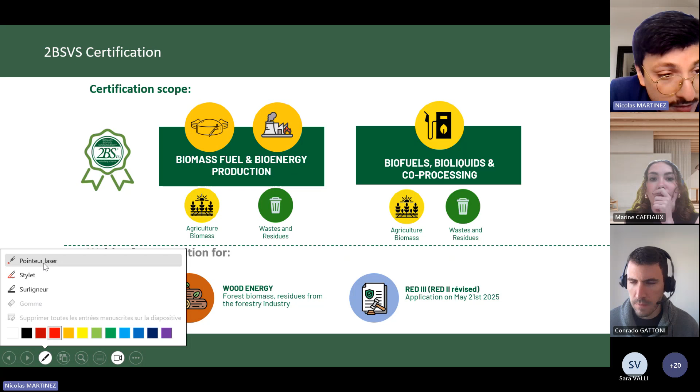We're going to talk more about co-processing, since this is the topic of our webinar. The documentation you can read for more details about the requirements and how audits happen can be found in two documents: the standard number 2 and the procedure number 6. The standards are like the checklist of the auditors, and the procedure is a more detailed document explaining the specificities of co-processing.

The procedure incorporates the following provisions, so you may also be acquainted with these two documents: the implementing regulation 2022/996, which has a chapter with specific rules for co-processing, and implementing regulation 2023/1640 about this as well.

As you know, co-processing refers to an oil refinery unit that processes, in addition to the usual fossil feedstocks, a biogenic part in the feedstock. At the end of co-processing these two feedstocks, we get a fuel of which a share is biogenic, thus considered renewable, and it can be claimed as such. To do that, you have to be certified and follow the requirements of the RED II.

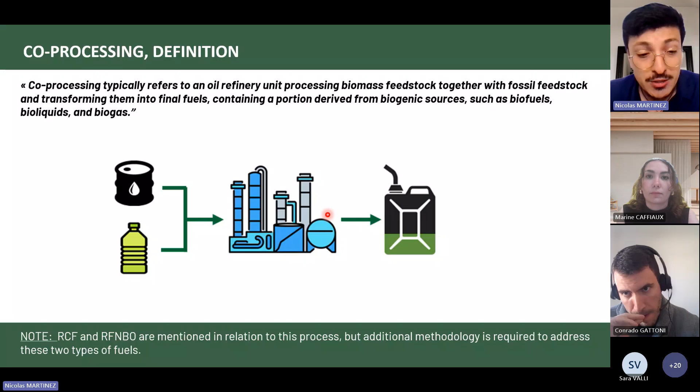Talking about the RED more in general, the two main pillars of sustainability are the eligibility of the raw materials to be part of the supply chain, and the greenhouse gas emission savings.

Concerning eligibility: if it's energy crops, they must come from sustainable land. The collection of agricultural waste and residues must not affect soil quality or soil carbon stock. And if it's waste and residues, they have to meet the definition of the Waste Directive 2008/98 and comply with the waste treatment hierarchy, prioritizing recycling, etc.

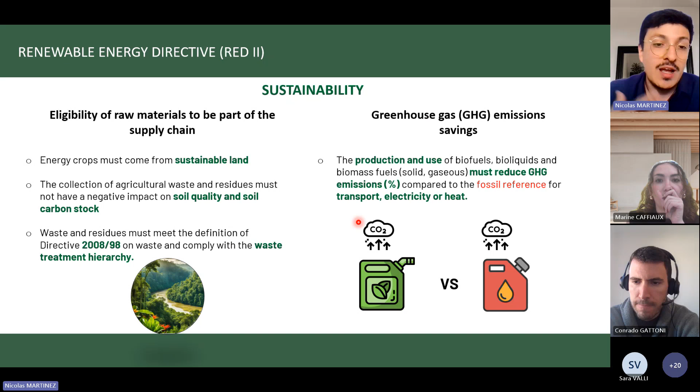Concerning greenhouse gas emission savings, you may already know this - we have to confirm that the greenhouse gas emissions to produce these biofuels are much lower than the fossil analog. There's a percentage stated in the RED about this. To compare, we have to calculate the footprint of these biofuels, to be sure we meet this criteria and have a positive impact on global warming.

Now let's talk about the scope and the certification of the actors in the supply chain. As you know, if we talk about waste oils or fats, waste and residues arise at the point of origin, the waste producers. Then there is a first gathering point - the first entity in the supply chain that gets certified and analyzes and confirms the sustainability criteria from these collected feedstocks.

Afterwards, these feedstocks are transferred to the next actors downstream in the chain. They can be traders, processing units, or other actors that process them into intermediate products. Afterwards, these processing units, the last interfaces, produce a fuel - in this case, a co-processed fuel.

There are two standards in our voluntary scheme: standard number 1, for the collection of raw materials, and standard number 2, for all the actors afterwards in the chain. Standard 1, for the first gathering points, concerns the collection of non-certified materials.

As you know, you see here it's black and it becomes green. The first gathering point ensures the sustainability criteria of these non-certified materials and issues sustainability declarations to prove conformity to the RED. Afterwards, there's the point about the audit of the central office.

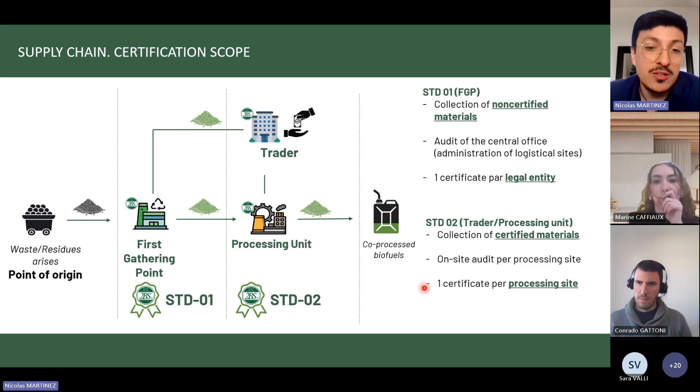After that, we have our product that is going to have a part of biogenic material. Concerning the greenhouse gas emissions, in the case of waste and residues, they are considered to have zero life cycle emissions according to the RED. So then there is going to be only the emissions due to the transportation from the point of origin to the actors in the supply chain.

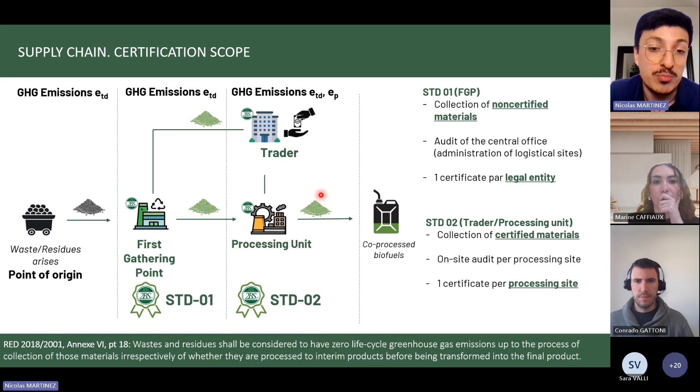The first gathering point, the same, only transportation. And afterwards, the traders or the actors certified in standard 2, they are going to have the EP, so for the processing itself, the emissions that were emitted for this.

Here you have a diagram of the whole supply chain, an example of it. So if you are a refinery producing biofuels, your suppliers may be traders or other processing plants. For example, if you use virgin oils, then the point of origin is going to be the agricultural sector. If it's waste and residues, it can be restaurants, industries, eco-organisms collecting used cooking oils, etc.

These points of origin will transfer a self-declaration to the first gathering point. This is the first actor that is certified in the chain. These can be cooperatives in the case of crops, or treatment and storage facilities for waste. These actors are going to transfer a sustainability declaration to the trader or processing unit downstream in the supply chain, and afterwards another sustainability declaration if applicable.

A little reminder: households or private individuals are not points of origin. The point of origin in this case is the first actor collecting these wastes, for example municipalities or eco-organisms in the case of collectors of used cooking oil.

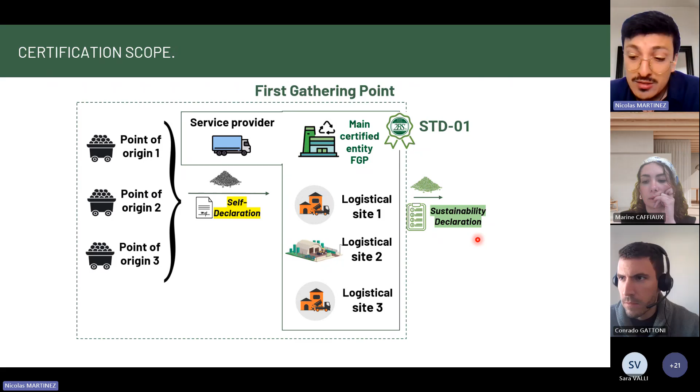Now I will give the word to my colleague Conrado about raw materials.

Thank you, Nico. Okay, let's move forward on this section. We will also discuss the criteria for raw materials requirements and the management system needed to ensure compliance. Just for clarification, this chapter may sound familiar to some people because the basics are the same as what you already know, according to standard 1 and standard 2. Please, next slide.

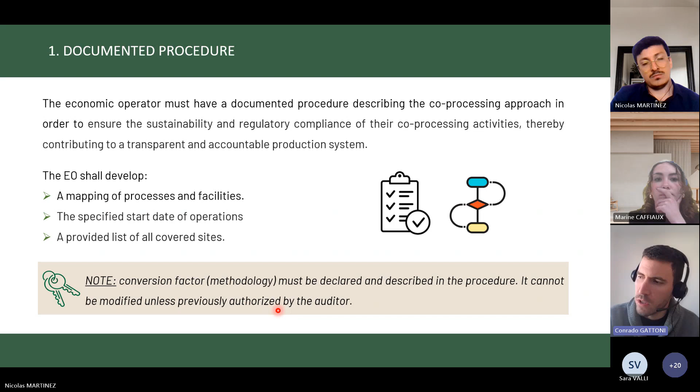Keep in mind, the conversion factor methodology must be declared and described in the procedure. It cannot be modified unless previously authorized by the auditor. When we refer to auditor here, we mean saving evidence of contact and reliable authorization from the audit team of the corresponding certification body.

Then there are primary residues, as residues of agriculture, aquaculture, fishery, and forestry. These materials also need to meet sustainability and GHG saving criteria, but in addition we must define what constitutes a residue through a decision tree, which is very important for distinguishing between materials that qualify as residues and those that don't.

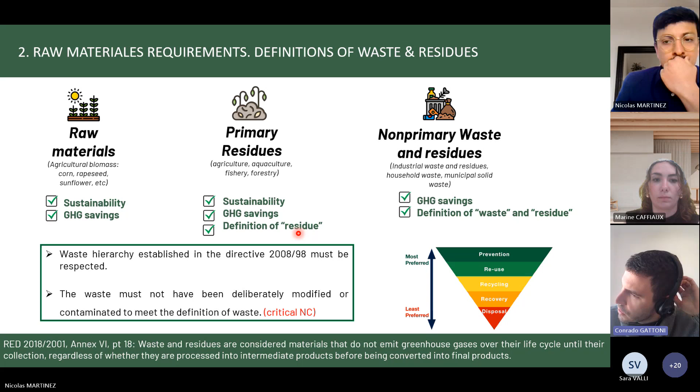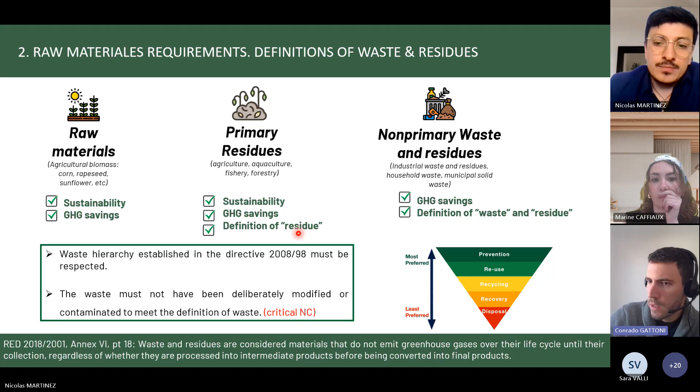The third point in the management system to take into account in this procedure is indicator 3.1, concerning the inspection of records, which is also intrinsic to internal reviews and monitoring activities that must be carried out annually. It's likely you already know this, since it's part of the internal reviews you perform annually, though this scope requires a stringent review to avoid mistakes.

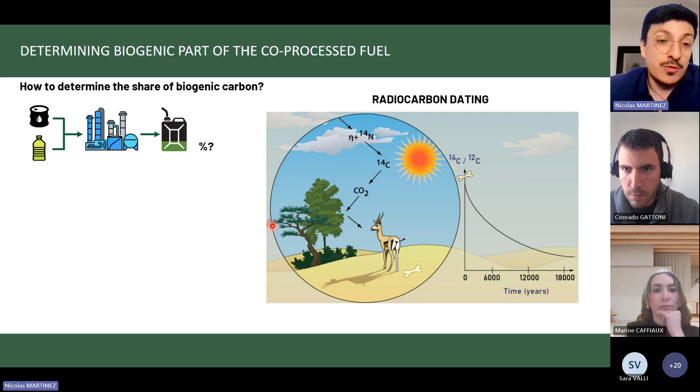The method preferred by the European Commission is radiocarbon dating. As you know, this is a method that measures the radioactivity of C14, which gives us an idea of how much is biogenic and how much is from fossil carbon. This method is mandatory according to the Commission.

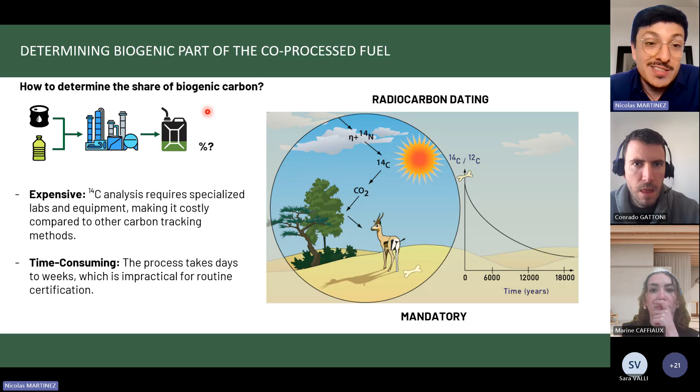The issue is that radiocarbon dating is expensive, requires specialized labs and equipment, making it costly compared to other carbon tracking methods, and time consuming. The process takes days to weeks, which is impractical for routine certification. Maybe some actors have radiocarbon dating in their facilities, but this is not very common practice. So the Commission allows figuring out these conversion factors and the biogenic part using other methods.

So how do we determine this biogenic carbon? Take the example of a refinery using fossil crude oil and vegetable oil. At the end, as outputs, we have gasoline, diesel, and kerosene. There is always a fossil gasoline and a biogenic gasoline, a fossil diesel and a biogenic diesel. The thing I'm trying to explain is that free allocation of biomass into the products is not allowed. You cannot say, 'I have 5% oil, so 5% of my gasoline is biogenic.' You cannot do that. The biogenic share is distributed among all the products.

Specific conversion factors are made for this reaction. So this vegetable oil converts into gasoline, diesel, and jet kerosene in this example, with different conversion factors. There is also a share of emissions, not only CO2, there's also CO and H2O attributed to the biogenic part. In case of multiple products, distinct conversion factors must be established for each product from each raw material. Biomass must be attributed to all products, including carbon monoxide, carbon dioxide, and water. So everything is distributed among all the products.

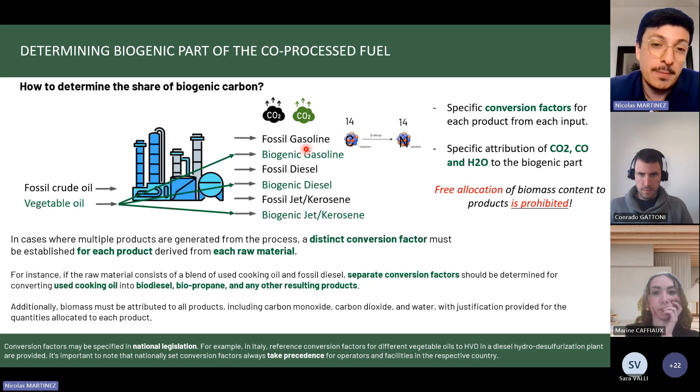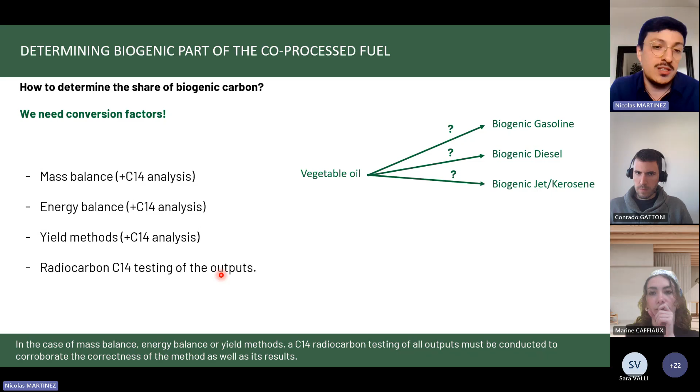As I said, C14 radiocarbon dating is the preferred method for the Commission. We measure the biogenic part of each product and get a percentage share. So how do we get these conversion factors, how to say how much vegetable oil converted into diesel, jet fuel, etc.? You have 4 options: mass balance, which still uses C14 analysis but just for calibration and rectification every 4 months; energy balance, also with C14; yield methods; and just the mandatory C14 method if you have that possibility. Let's talk about the methodology for each.

Mass balance methodology has the idea of mass, as the name says. If we have fossil crude oil as an input and biogenic oil as another input, then we have a fuel as a product, and we measure the mass. We perform C14 and calibrate our mass balance method, so we know that the biofuel has, say, 30% of a certain biogenic content. But since it's a mass balance, you cannot attribute the biogenic part only to one product. Everything is divided among all the products.

So the mass balance, the equivalence on both sides of the equation, means if there is 20% biomass in the inputs, the hypothesis is that at the end you will have 20% mass of biogenic source. This includes the mass of off-gases, liquid industrial wastewaters, and residues. Everything is taken into account mass-wise, and this 20% has to be proportional. This method can be used and will always be rectified by the C14 radiocarbon method.

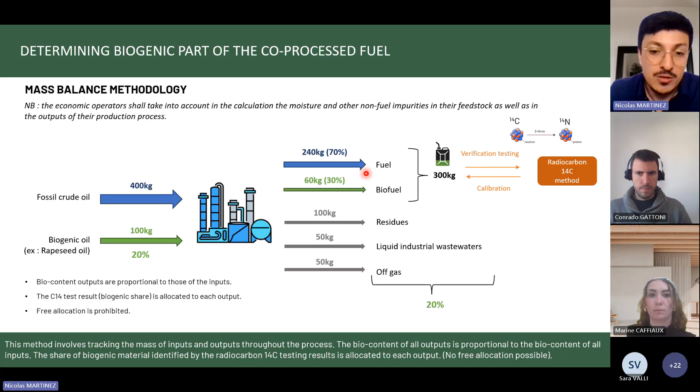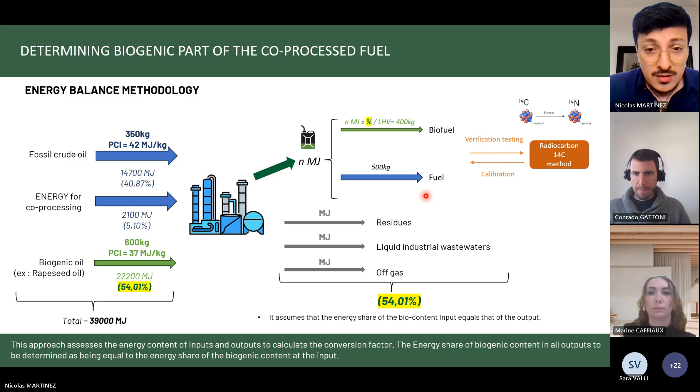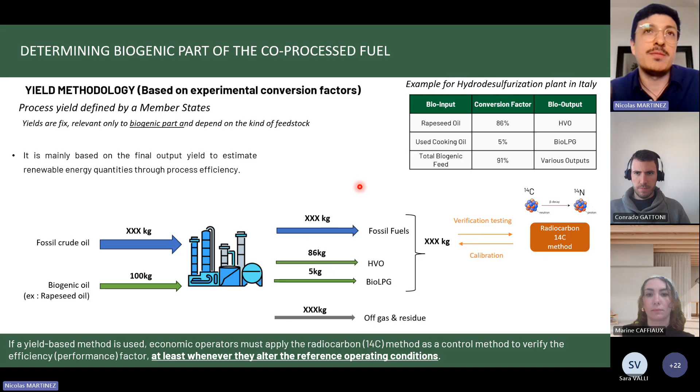Next is the yield methodology based on experimental conversion factors. If a member state has already defined a conversion factor to be used within its territory, it can be used by economic operators and refineries as default conversion factors. For example, in Italy, for a hydrodesulfurization plant, these are the conversion factors for rapeseed oil and used cooking oil - these bio outputs and values can be used right away by economic operators as default. It has to be officially recognized by the member state, and these calculations and values are validated by the Commission.

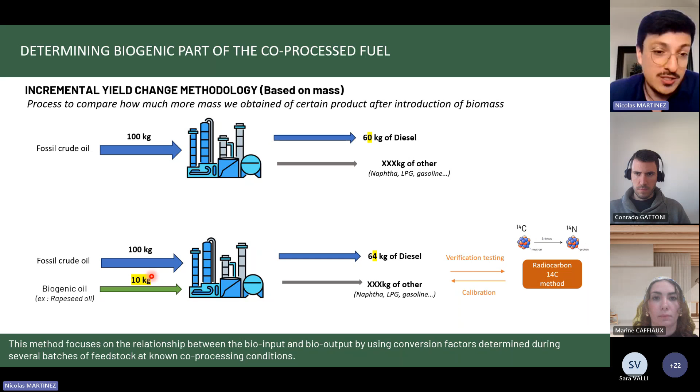The radiocarbon 14 method will be used to verify the correctness of this method. If you have several batches that have been done with specific conditions, you can link the biogenic oil input with the output of a certain amount of biodiesel. This can be done, but several batches have to be produced to have enough evidence to present to the auditor. Everything is based on the accuracy, the reliability, the evidence that you can provide about the methodological choice that you apply.

At the end, you have a C14 analysis. The economic operators that check this C14 have to apply the accelerator mass spectrometry method. If the bioshare is expected to be at least 1% of the volume, they may alternatively apply the liquid scintillation counting method. The labs that do this analysis have to be certified with different standards - you can find more details in our documentation.

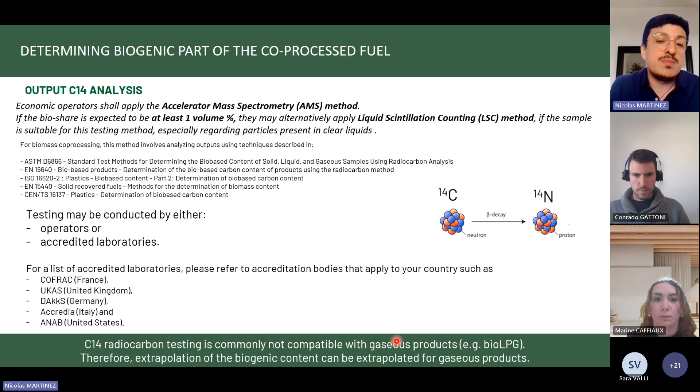The testing may be conducted either by operators themselves if they have their own laboratory on site, or by accredited laboratories. This accreditation of laboratories will depend on the country you're in - so in France, it's COFRAC, UKAS, DAkkS, etc. It's important to remember that C14 radiocarbon testing is commonly not compatible with gaseous products, for example bio-LPG. Therefore, extrapolation of biogenic content is allowed.

Experimental measurements conducted on pilot plants using individual components or model systems related to the coprocessing facility are permissible in the initial certification process, but then they have to be verified and supplemented with field evidence obtained during the actual co-processing phase in the plants.

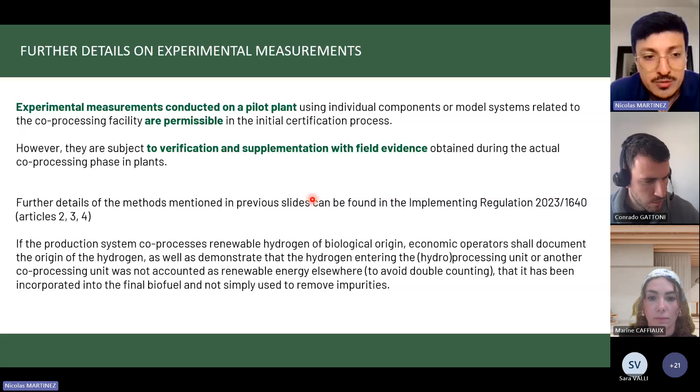This is the implementation that governs these rules. If the production system co-processes new renewable hydrogen of biological origin, we have to make sure no double claiming, no double counting of this hydrogen takes place. It's the responsibility of economic operators to prove to the auditor that this renewable hydrogen is not counted as renewable elsewhere, and that the actual hydrogen was used and implemented into the co-processed fuel. So that's quite logical.

There's further detail about this measurement. If the radiocarbon test method is used as a second method - so in the case of mass balance, energy balance, or yield methods - then a deviation of up to 1% in absolute terms for the result of the main method used is accepted. This is the maximum; deviation of more than 1% would be considered not valid. In the initial year, 3% deviation is accepted because you're calibrating your method. So there's some flexibility.

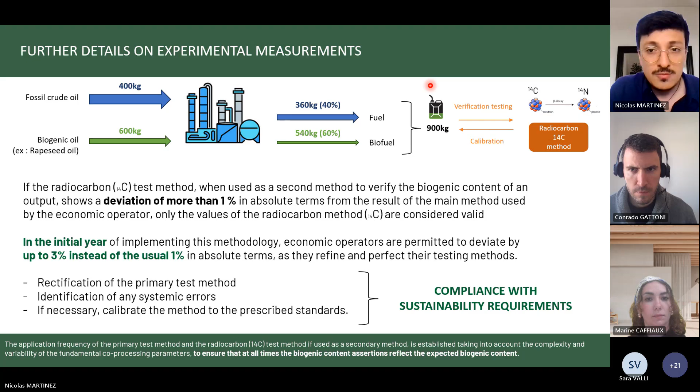But when we talk about sustainability in co-processing, it's always about compliance with the rectification of the primary test method, the identification of any systemic errors and their correction, and the calibration of this method if we have deviations. This radiocarbon 14 method is going to be used in any case to verify it, and has to be applied at least once every 4 months, to be sure the method is always consistent. And whenever a change occurs in the composition of the raw material higher than 5% versus the reference condition - because a methodology is always defined for a certain condition. If a yield has been defined, it's always taking into account the specific condition for which it was obtained.

So if there is a change in the share of biogenic inputs, the quantity of hydrogen and catalyst in the total mass, or process parameters like temperature, pressure, composition of the product, etc., this radiocarbon method has to be applied to corroborate these new conditions to rectify, unless the applied method can identify the operating conditions relating to biogenic content in the output of each batch. This means that if you have enough evidence and understand your processes well enough to predict that changing a parameter will cause a certain increase, this can be accepted. But you have to compile the evidence and arguments to justify it.

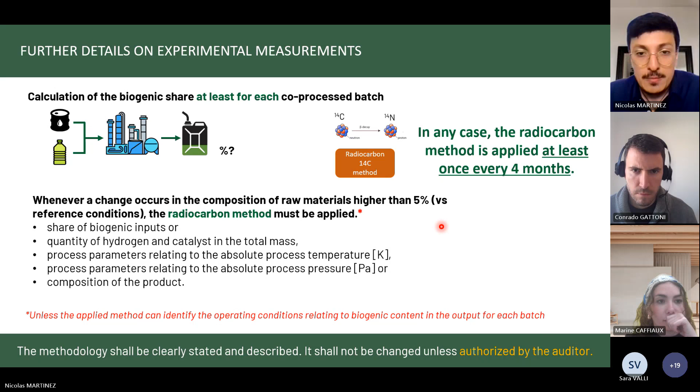The methodology shall be clearly stated and described, as Conrado was saying. It shall not be changed unless authorized by an auditor. So three reminders for economic operators that do co-processing: keep the samples for at least 2 years concerning all biogenic co-processing batches, provide certification bodies and auditors full access to these samples, records, and methodologies, and make available a detailed description of the main test method used, including indication of accuracy and precision, also verified with radiocarbon. So everything has to be clear in this way, with methodology and hypotheses properly argued.

Concerning the mass balance system - not the mass balance method for conversion factors, but the mass balance system - what is it? It's the flux of feedstock and output. We only look at the renewable part, because we are certifying only the biofuel. So we have the information on greenhouse gas emissions of the feedstock, the documentation that comes with it, the sustainability declaration, and the type. We have this system where inputs enter, and outputs show how much biodiesel or biokerosene we produced.

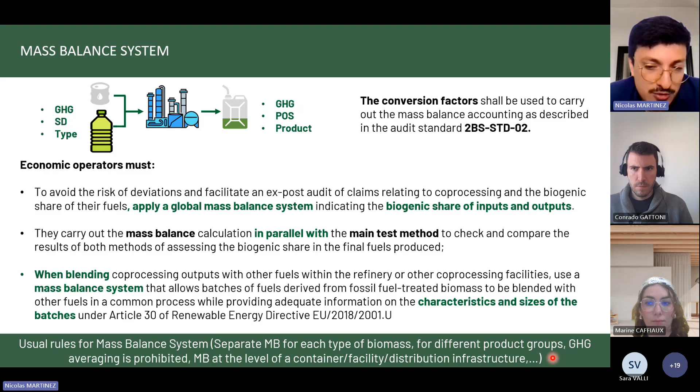And the mass balance at the level of the container, facility, or distribution infrastructure - everything is as normal, this slide just repeats the rules, and this is the scope of the processing unit. These logistical sites are where the mass balance at the level of a container, facility, or distribution infrastructure can be organized according to these rules.

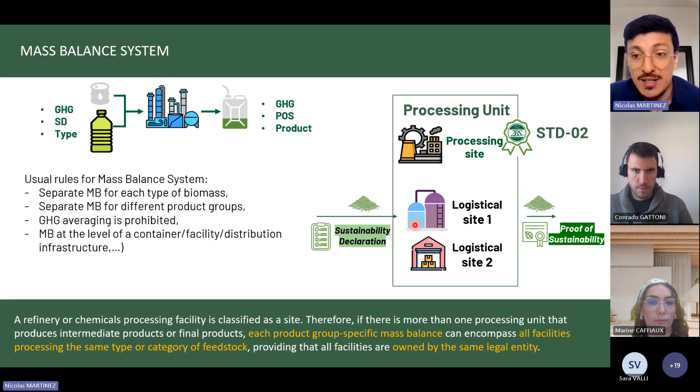Now we're going to talk about the greenhouse gas emissions methodology. As you know, we need to compare biofuels and fossil fuels to be able to claim we're generating a positive impact. In the co-processing scenario, you have the upstream emissions, the extra reagents used for co-processing, the emissions from the co-processing itself, and transport as usual. The extra reagents include any reagents with their upstream emissions, the footprint from the factory that created them. For crops or vegetable oils, there's the extraction and cultivation of these crops, land use change if it occurred, etc. - everything that went into the virgin oil.

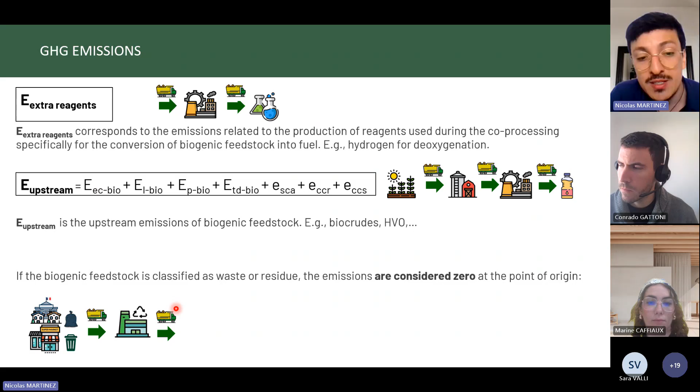And for waste and residues, as I said, they are considered zero, but the transport of it has to be taken into account. The CO2 of the co-processing unit must not be taken into account into the calculation. And the process for production shall be the comparison of 100% fossil fuel compared to a co-processing scenario. We compare the emissions, and then we share the emissions accordingly to every product. But very important, biogenic CO2 is excluded from the calculation.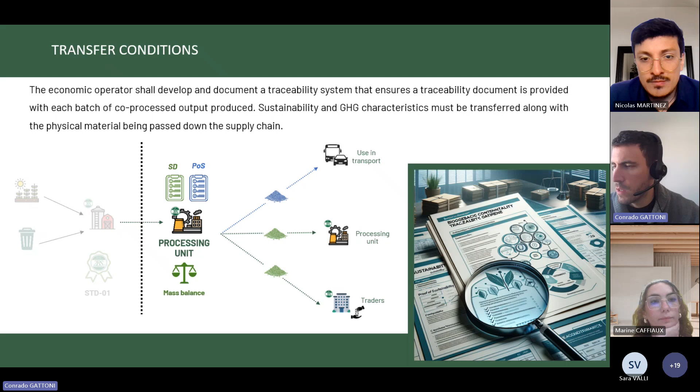So let's review another example in the next slide. Here we are highlighting one of the most important indicators in principle 3 of the updated standard 2, which applies either for transformers and the last interface mainly. This indicator, by the way, is critical, and it mentions the following: the economic operator must ensure that all traceability documents accurately reflect the biogenic content and compliance with sustainability criteria for each co-processed batch.

Therefore, with this intuitive and simple example, we can see that during the review, the economic operator has stated that for batch A, 65% of the quantity corresponds to biogenic content. So how could they provide reliable evidence during the audit? Well, through a detailed cross-checking, as I mentioned, of delivery documents, mass balance, invoices, and the sustainability declaration or POS when needed.

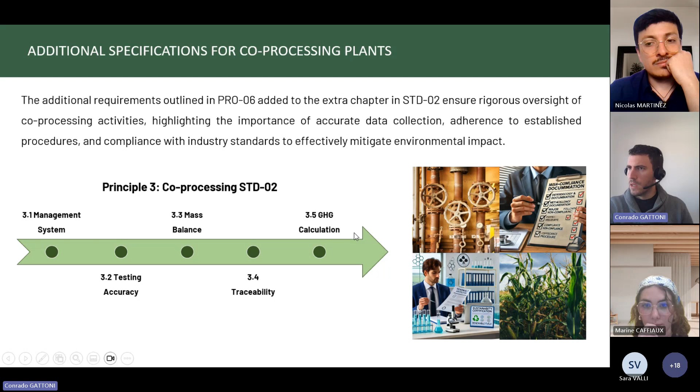So on the other hand, we have the Pro 06. Let's take a look at what it's about. This new procedure, as I mentioned, outlines all the requirements taken into account to extend the standard 2 scope. The Pro 06 has added 4 specific requirements, which are: at the beginning, validation of the applied methodology with control testing and the type of analysis used, as Nico explained in chapter 4.

Secondly, the treatment of deviation - an important paragraph at this stage - any changes, errors, inaccuracies that result in a deviation from the previous step must be treated as a major non-conformity. Then the consistency with industry standards: the final values are based on certified and approved methods with typical ranges derived from industry standards and case studies. And finally, we have the verification of feedstock, which helps confirm the reliability of data related to the inputs and outputs of the co-processing plant.

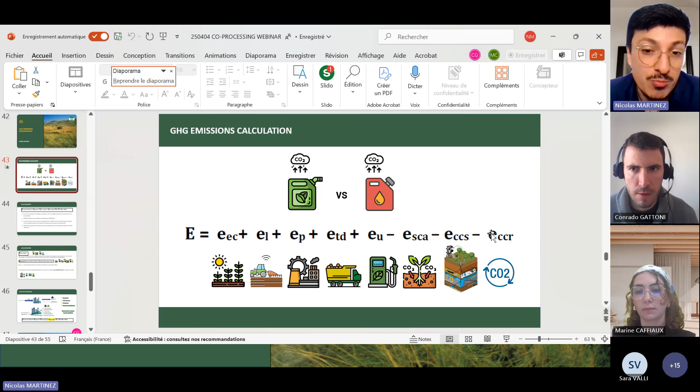Here is the normal equation about greenhouse gas: the extraction and culture of crops, the land use change factor, the processing for the production of intermediate products or fuels, the transport and distribution steps for the supply chain, and the use of this biofuel, plus the three bonuses that are for improved agricultural practices, carbon storage in geological sites, and replacement of fossil carbon by carbon in products.

So if we break down the greenhouse gas equation: the extra reagents - if we have some hydrogen for the deoxygenation or other chemical products, we have to take into account all the emissions that come from it, the emission factor of it. There was a factory that created them, so we have to take into account their emissions. When we buy this bottle of reagent, we need to take into account these background emissions.

Then we have the upstream. Depending on which feedstock you use, if it's a virgin oil, then there was a milling factory that produced this oil. Then there is a cooperative or a first gathering point that gathered these crops, and a farmer that grew these crops. So this is the addition of all these factors.

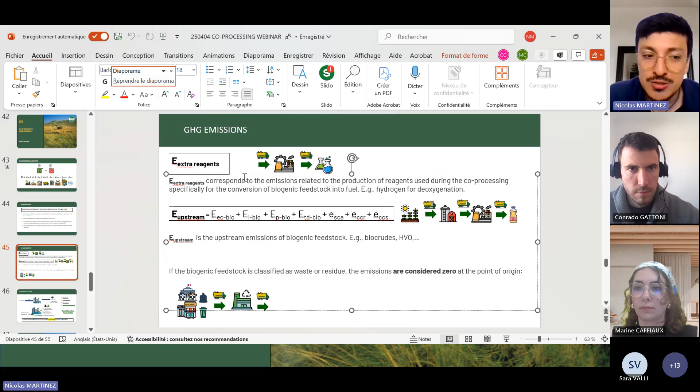I hope that answers your question. If not, you can also write us with more questions, or send an email. We are always very available for any question that you have. If you find difficulties in the certification process, etc., we are here to support you.